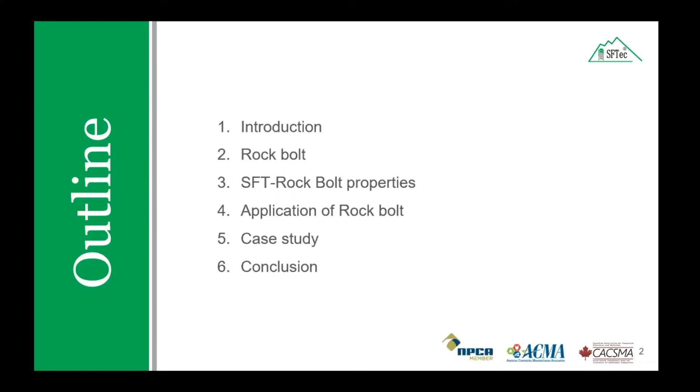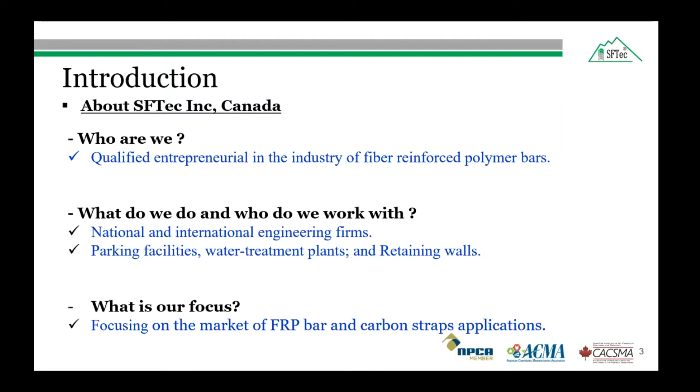We work with national and international engineering firms through the design process and help them with the fiber reinforced polymer design standards, whether they are in Canada or the United States. We focus on parking facilities, water treatment plants, and retaining walls, mainly on glass fiber bars and carbon strap applications.

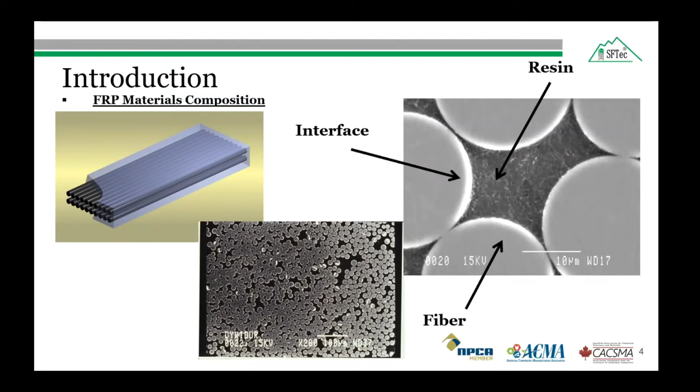The SFTec fiber reinforced polymer bar is made from composite materials, fiberglass or carbon fiber, manufactured by a pultrusion process using a mix of recycled fibers and resins. This figure shows the microscopic view of the FRP bar. There are three different types of FRP bars available in the market: carbon, aramid, and glass fiber reinforced polymer bars. The stress-strain plots show how these FRP bars compare with steel bars.

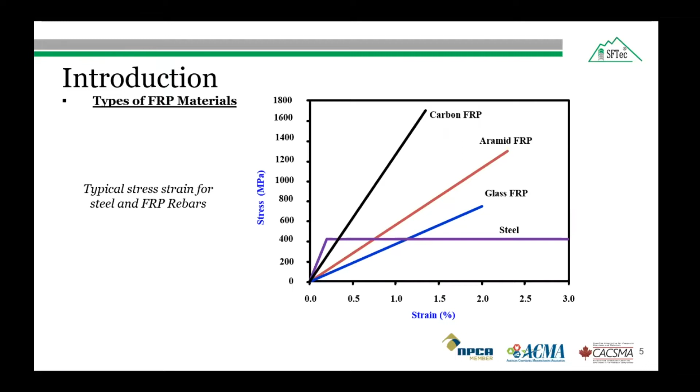Two points should be noted from this plot. First, glass fiber reinforced polymer bars have lower strength compared to the other FRP bars. Second, the strength of all the FRP bars is higher than that of steel bars. However, the behavior of the fiber reinforced polymer bar is linearly elastic up to failure.

We can produce different types of fiber reinforced polymer products depending on the project's requirements. Some of the FRP products we produce are straight bars, spiral stirrups for transverse reinforcement, bent bars, and glass fiber reinforced polymer shear connectors.

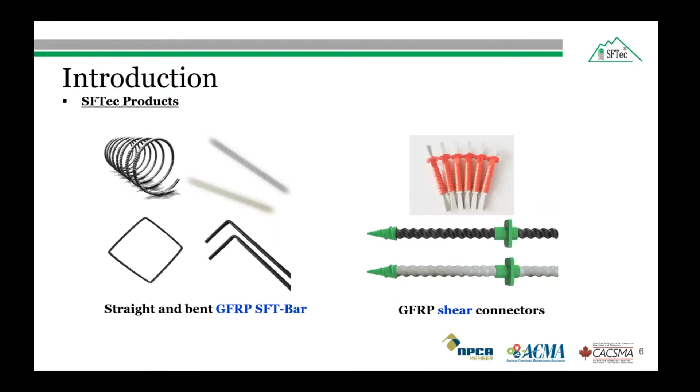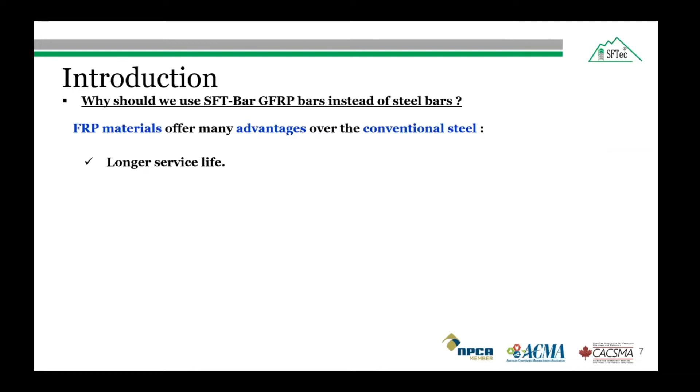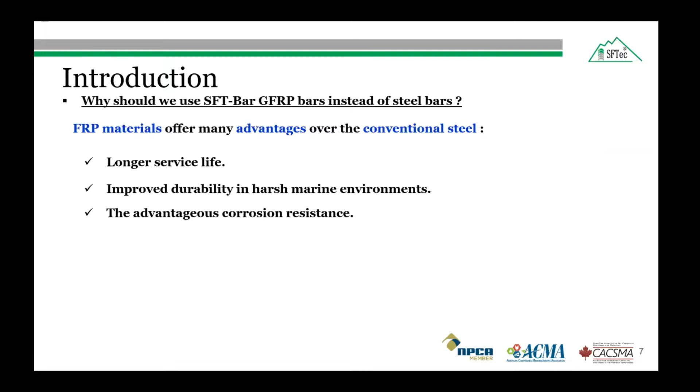Some advantages of the SFTec glass fiber reinforced polymer bar over conventional steel bars: it has a longer service life because of its corrosion resistance, therefore improved durability in harsh environments such as construction near coastal areas and in North American cold climates. The FRP bars have better resistance against corrosion compared to steel bars, and as I mentioned, the tensile strength of FRP bars is 2 to 3 times more than that of steel bars.

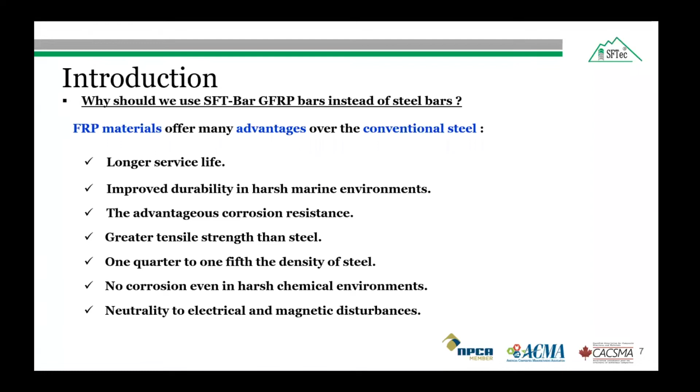Fiber reinforced polymer bars are lighter due to low density compared to steel bars. Due to their corrosion resistance, FRP bars are good for harsh chemical environments as well. They are also neutral to electric and magnetic disturbance, useful for applications such as airports, military applications, MRI rooms, and hospitals.

Some selected field applications of SFTec fiber reinforced polymer bar we have already completed in Canada: glass fiber reinforced polymer bar reinforced concrete waffle floor slab designed with SFTec glass fiber reinforced polymer bar, which was built last year in Halifax, Nova Scotia.

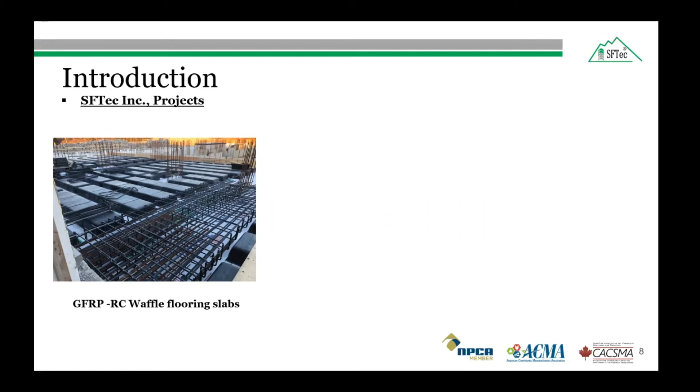It can be used for slabs on grade, and it is a non-structural slab, a one-to-one replacement — whatever you use in steel design, you can use the same for GFRP reinforcement on a GFRP slab on grade design. This will save a lot of money compared to steel bars in terms of labor and transportation.

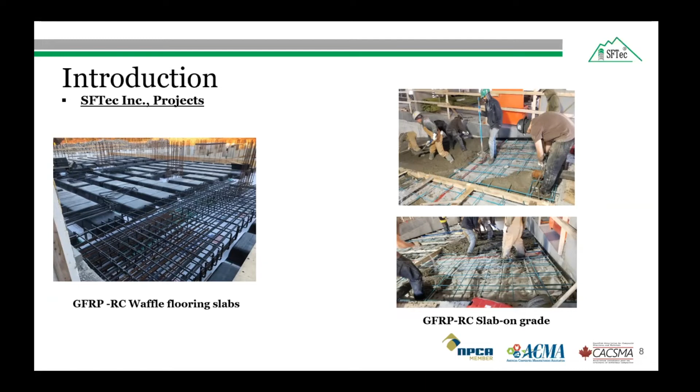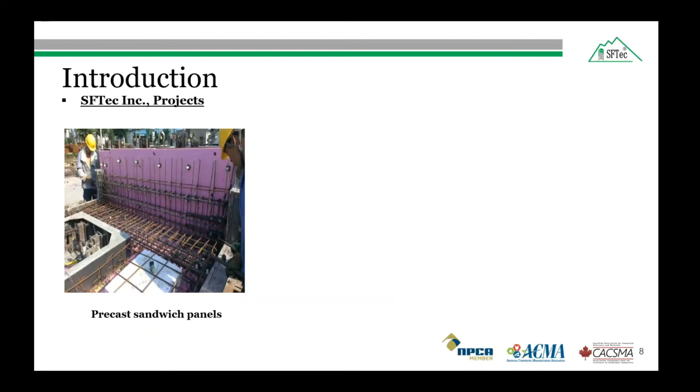Another project saw the cast in situ precast sandwich panels, and they have used our glass fiber reinforced polymer bar in their project as reinforcement, and it was built in China.

On the right is a retaining wall built for the city of Montreal, designed to dump snow with de-icing salt during the winter. They built this retaining wall with SFTec glass fiber reinforced polymer bar, which provides resistance against the chemicals used in the de-icing salts.

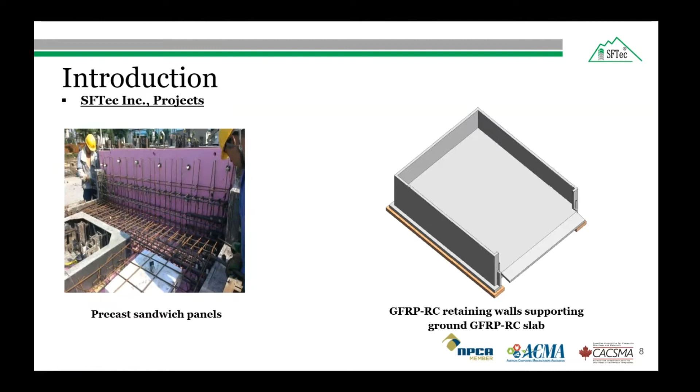Now coming to our main topic, RockBolt. Before going to the presentation, let me define what RockBolt is. A RockBolt is a long anchor bolt generally used for stabilizing rock excavation, used in tunnels, mining, or rock cuts. The RockBolt transfers the load from unstable exterior to the confined, or much stronger interior, of the rock mass.

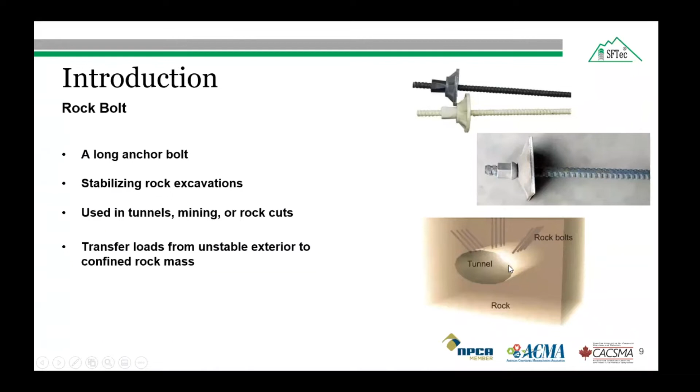As you can see, the tunnel is a hollow section, and the RockBolt is connected to the rock mass to provide stability to the upper rock masses.

What are the present problems with steel RockBolt? The problem of corrosion and cracking bolts in coal mines and other underground mines, and high variability of mine water corrosivity in mining industry. The use of high tensile steel for rock bolts and anchor bolts presents a great incidence of corrosion, which is dangerous in underground environments. In aggressive environment conditions, such as coal mines, steel bolts corrode in a matter of days rather than years.

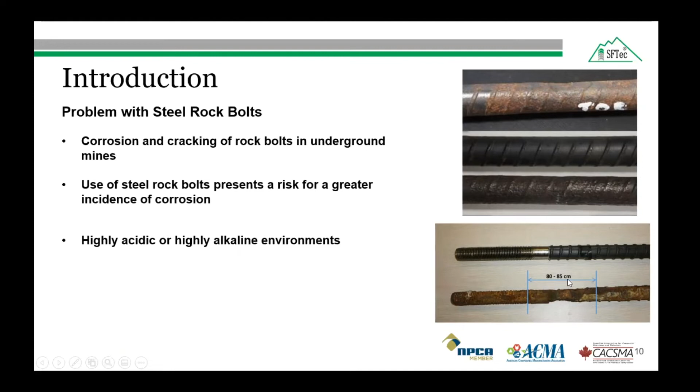RockBolt might be installed in a highly acidic or highly alkaline environment that promotes accelerated corrosion. As seen in this figure, the RockBolt made of steel generally corroded after 2 months.

Compared with the conventional steel RockBolt, a fiber reinforced polymer RockBolt has several advantages. For example, high tensile strength, relatively low shear strength, extremely low conductivity, durability, and most importantly, corrosion resistance. Fiber reinforced polymer RockBolts can be cut easily without creating any sparks, and therefore are suitable in coal mines. Finally, fiber reinforced polymer RockBolts can be useful in mining and underground projects.

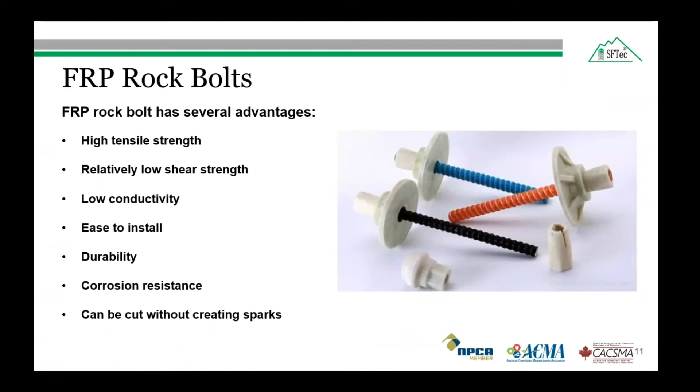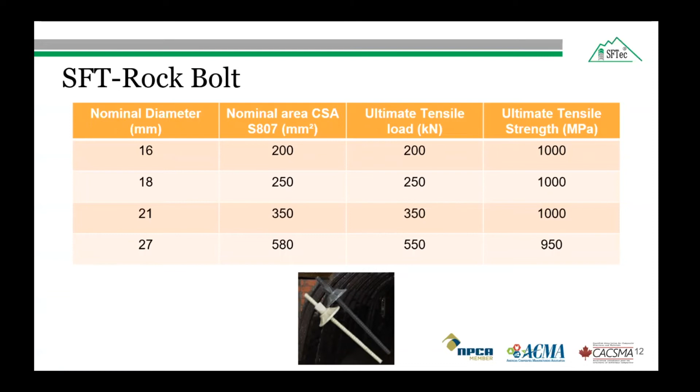The SFTec RockBolt is a rock bolting system based on fully threaded solid glass fiber reinforced polymer bar, with a nominal diameter ranging from 16 millimeter to 27 millimeter, a nominal area of 200 to 580 square millimeter. It can carry an ultimate tensile load of 200 to 550 kilonewton and ultimate tensile strength of about 1000 megapascal.

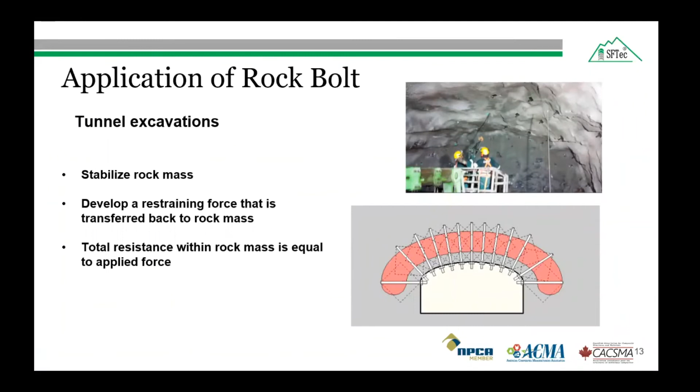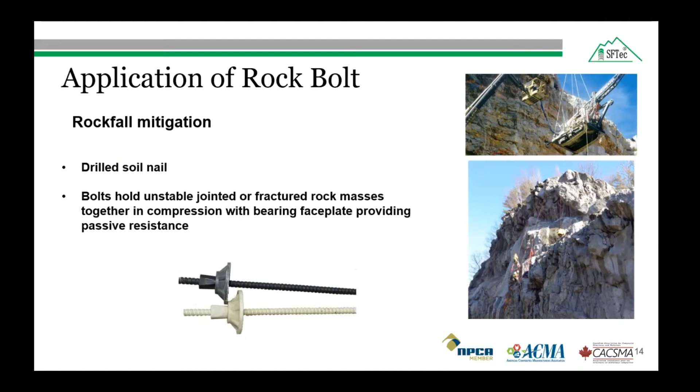In the second application, the RockBolts are a type of drilled soil nail used when the ground to be stabilized consists of rock materials. The bolt holds unstable jointed or fractured rock masses together in compression with bearing face plates as shown in the figure, providing passive resistance, forming a more stable structural entity.

The RockBolt application is not only limited to the mining and tunneling industry. In the present day, it is also used in stabilizing rock cuts, steep slopes, bridge abutments, and reinforced concrete dams.

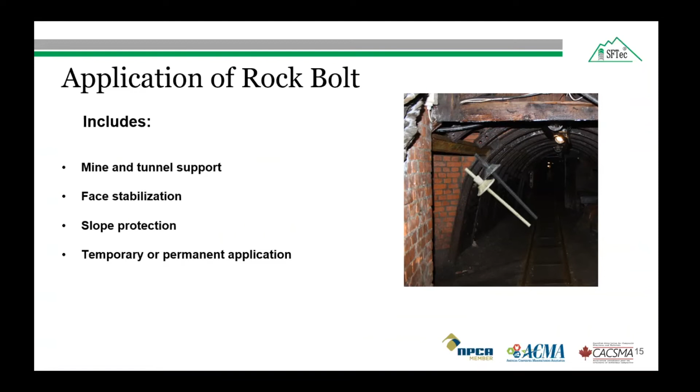Going through our first case study, the Vereina tunnel. The Vereina is a narrow gauge railway tunnel in eastern Switzerland and is an excellent example of use of permanent glass fiber reinforced polymer rock bolts in a demanding environment. Construction of this tunnel began in 1991 and it came into operation in 1999. With an overburden ranging up to 1,500 meters and highly heterogeneous geology, many challenges for the tunnel excavation had to be overcome, including rock burst as well as extensive water inflow and squeezing.

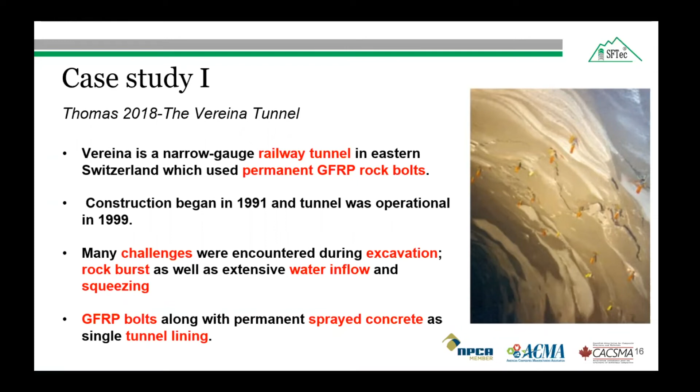The Vereina tunnel used permanent sprayed concrete as a single tunnel lining along with glass fiber reinforced polymer rock bolts as the permanent rock support. Additional sprayed concrete and glass fiber reinforced polymer rock bolts were added later to cope with the requirements of permanent support and guarantee long-term stability.

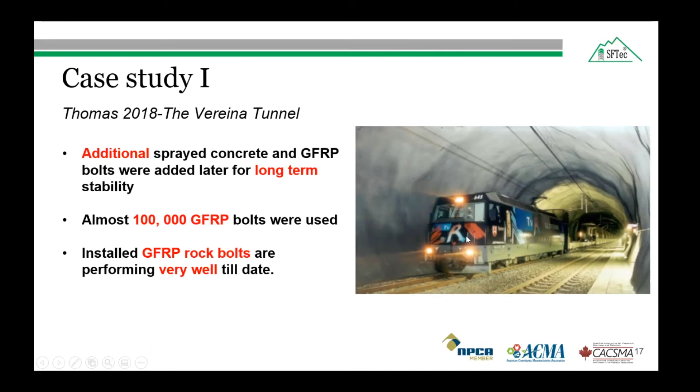Altogether, almost around 100,000 glass fiber reinforced polymer rock bolts were installed, and it had been 22 years since the tunnel came into operation in 1999. The rock support has been inspected regularly, and the GFRP rock bolts are performing very well. You can see in this figure the tunnel from where the train is passing.

It was located in the northwest of the Pearl River Delta. The total length was approximately 2.5 kilometers. The tunnel shape is circular with a radius of approximately 3.35 meters and an average burial depth of approximately 18 meters.

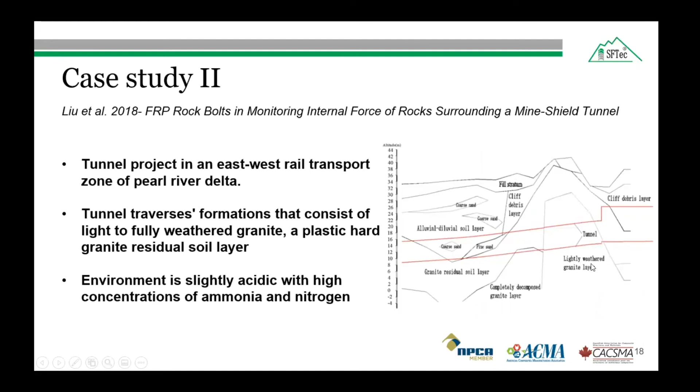The tunnel was constructed with the shield method from west to east, and within 100 meters of the east terminal, as you can see in this figure, we find the lightly weathered granite layer and boulders with a rising local rock surface, which create challenges for the shield drilling.

In that case, the construction was based on the initial mine tunneling excavation, followed by the shield segment.

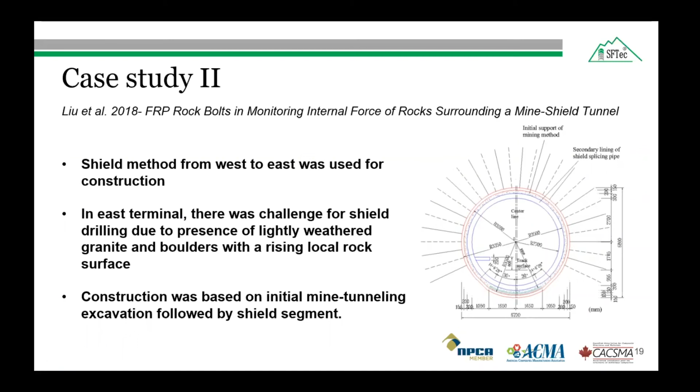As we can see in this figure, the equipment used for monitoring the internal force of the rocks surrounding a mine shield tunnel for initial support consisted of a fiber reinforced polymer bolt, which had a length of 8.2 meters, a diameter of 18 millimeters, tensile capacity of 203 kilonewton, shear capacity of 101 kilonewton, and modulus of elasticity of 45 gigapascal.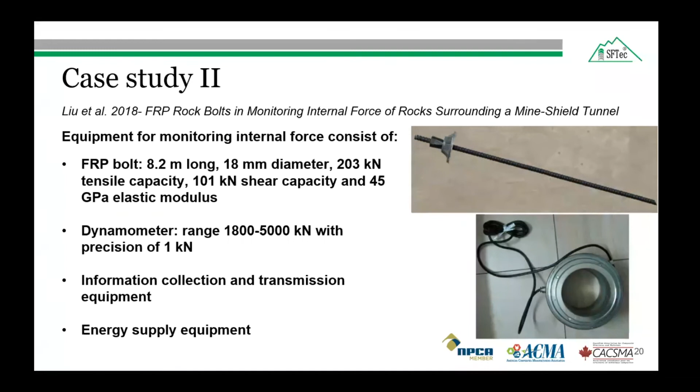There was also information collection and transmission equipment, which consists of a mechanical information collecting module, a computing module, and a transmission module. The energy supply equipment was based on a solar energy power supply system, consisting of a lithium battery and a solar panel.

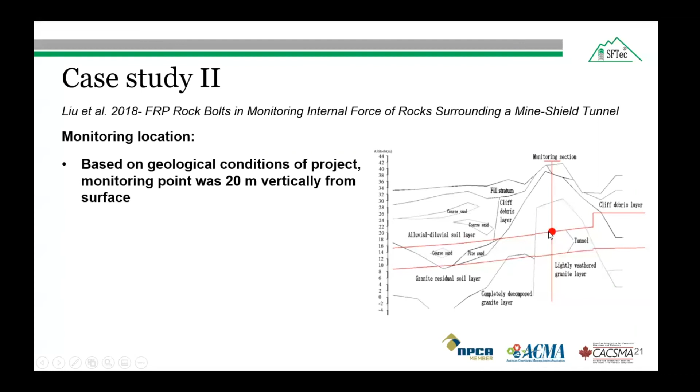Based on the geological condition of the support project and requirement of the construction project, one fiber reinforced polymer rock bolt based monitoring point was used. As you can see here, the monitoring point's vertical distance from the surface was about 20 meters, and this figure shows the vertical section where the monitoring was done.

The tunnel section was circular with a radius of approximately 3.35 meters, excluding the initial support and segment. The tunnel clearance radius was approximately 3 meters, as you can see from this figure.

Based on the actual operability and requirement for continuous operation without interruptions, a monitoring point, located here, was positioned at 330 degrees around the section as shown in this figure.

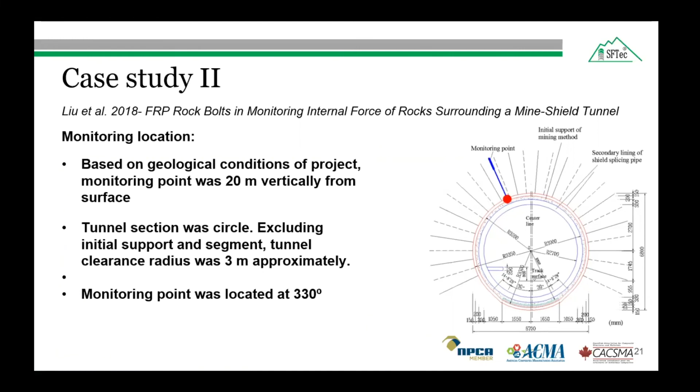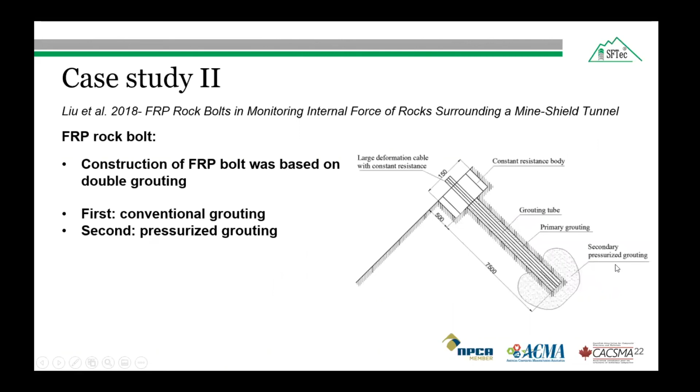The construction of the fiber reinforced polymer rock bolt was based on double grouting. The first was conventional or primary grouting, as shown in this figure, and the second was pressurized grouting with a grouting pressure of 5 to 6 megapascal.

Once the tunnel mining excavation was completed, the dynamometer was removed before the shield machine reached the monitoring point. After that, the shield machine's cutter cut the FRP rock bolt, and as the FRP bolt has low shear strength and is brittle in nature, it was cut into fragments with no impact on the shield machine.

This is contrary to steel rock bolts, where if the shield machine cuts over a steel rock bolt, there will be some impact on the shield machine.

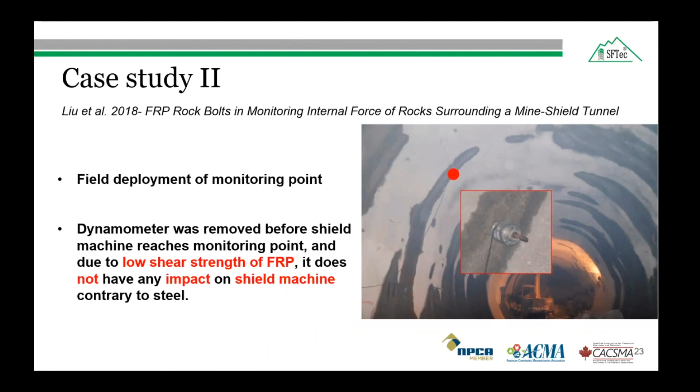Now, why should we select SFTec rock bolts? Because they can be installed with resin cartridges or forced into the pre-grouted holes.

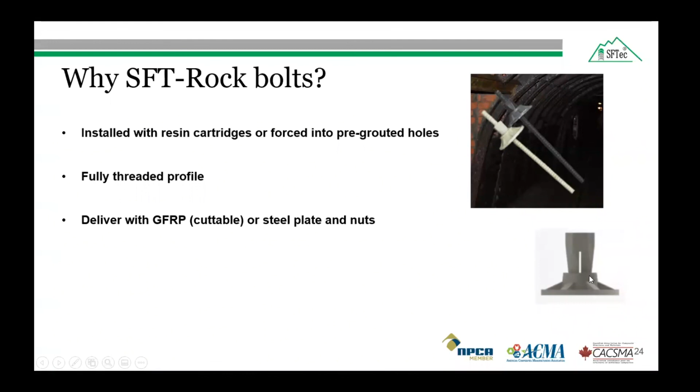SFTec rock bolts are made of fully threaded glass fiber reinforced polymer profile for optimum mixing and bonding properties. SFTec rock bolts can be delivered either with glass fiber reinforced polymer, which is cuttable, or with steel plates and nuts. Here you can see the glass fiber reinforced polymer plates and nuts.

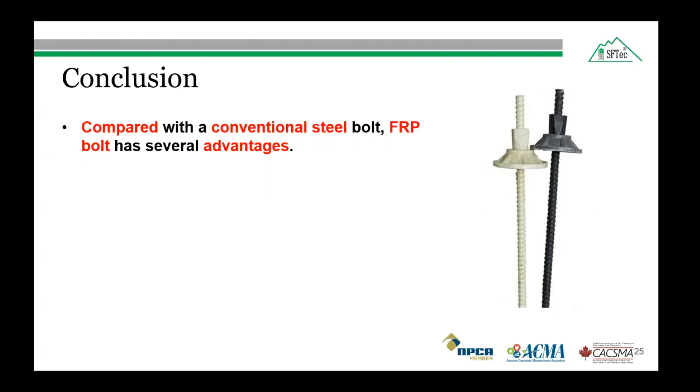In conclusion, the high tensile strength, relatively low shear strength, extremely low conductivity, and most importantly, corrosion resistance of fiber reinforced polymer rock bolt make it suitable for harsh underground mines and tunnels.

The fiber reinforced polymer rock bolt system provides an effective and safe method for remotely monitoring the internal mechanical behavior of rocks in a mine shield tunnel.

Finally, the corrosion resistance capability of fiber reinforced polymer rock bolt provides better serviceability compared to the steel rock bolt, which corrodes in days in harsh underground coal mines.

But with FRP, it is not going to corrode. As I saw in one case study, it has been 22 years, but the tunnel is fine. The GFRP rock bolts are still working there.

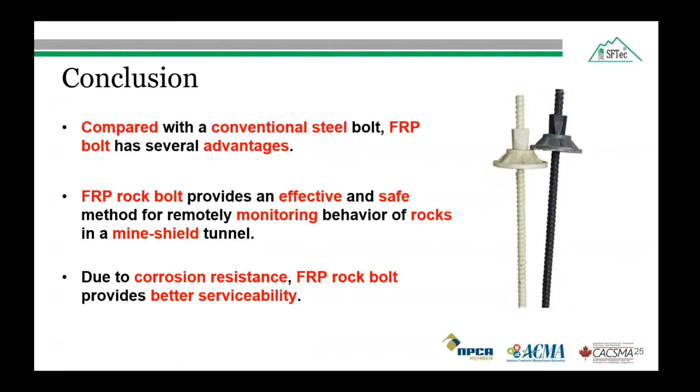So you can find the FRP rock bolt, which is available at SFTec as the SFT rock bolts.